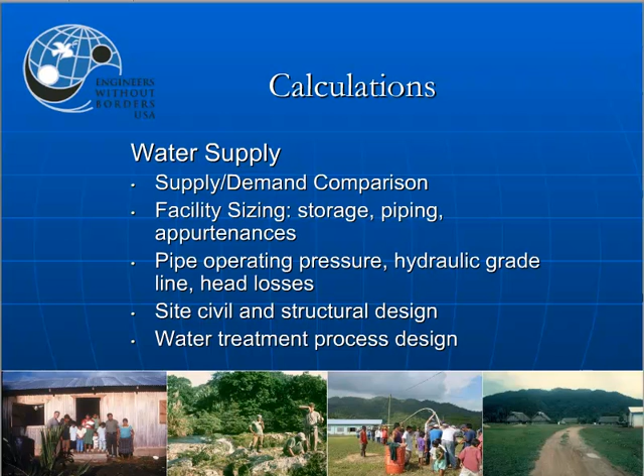You may have a specific problem in your design that you need something else that's not listed here. Well, you have to supply that. You can't just say, oh, well, you didn't have it listed in the calculations we had to show. This is really just a bare minimum. You may need, and you probably will need, additional ones. I just don't know what they are because I don't know what your exact project is.

And so now let's look for a little bit at what kind of structural calculations you'd need. Number one, the design loads. I can't stress this strongly enough. You have to say at the start of all the calculations, these are your loads. And you have to have that backed up with some kind of documentation that it's appropriate for this area. Secondly, the material strength. We need to know what you're assuming for the material properties for everything that you're using in your project.

For the soils, you have to let us know whatever's appropriate for the structure you're doing. It may be that the only thing that matters is the bearing capacity. Fine, tell us that. It may be that you need to know the passive and active earth pressures for a retaining wall. If that's the case, then tell us those too. But tell us up front, these are the soil characteristics.

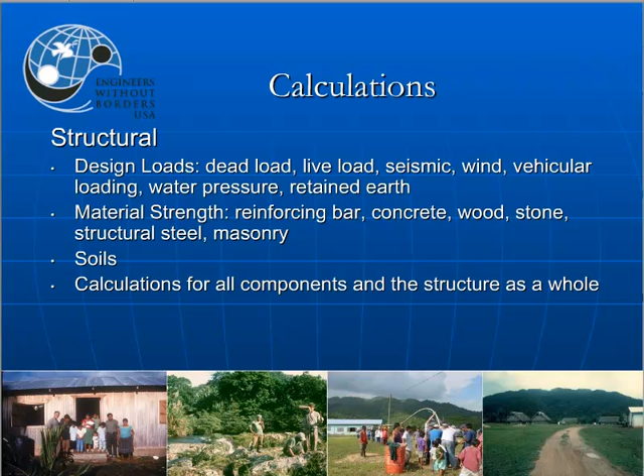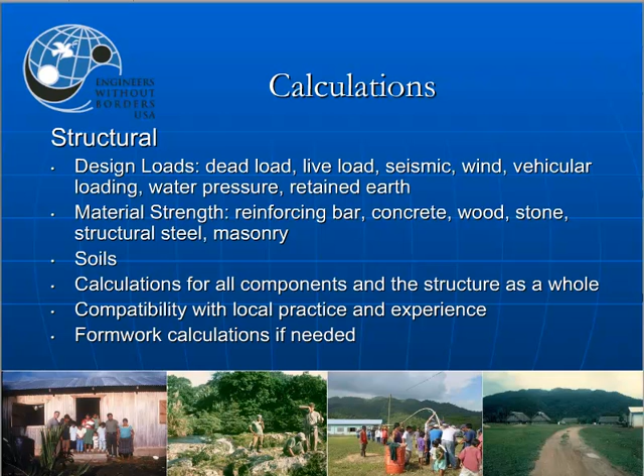Then we need calculations for every component of the structure and the structure as a whole. If there's any little bit of the structure that has not been designed and there's not a calculation for it, be prepared that it will be considered deficient because we were expecting a calculation for it. We'll expect that your design, your calculations are compatible with local construction practice and local experience. And then always remember to include formwork calculations for concrete work if it's appropriate.

So now let's go on to the drawings, and we'll start with general expectations. These should be a complete depiction of the facility. It's not some conceptual level sketch. And anything you intend to construct has to be described in a drawing. And the one thing I would say is, we have a lot of example drawings on the EWB-USA website. We have some ones that I would consider great drawings, including a bridge drawing on there. And then we have some that I would consider real good, including some water system drawings and a structure. And those, of course, are not appropriate for your specific project, but they let you know the level of effort that is kind of required in order to get approval from the Technical Advisory Committee.

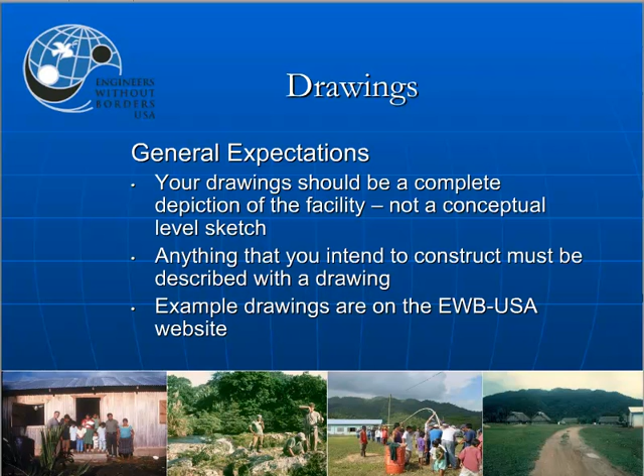So let's go on now to some specific instances of what would be required for drawings, and for structures, and let's start with buildings and tanks. Number one, cover sheet, including a location map and a site plan, foundation and floor plan, roof plan, building sections, building elevations, and wall sections. And if students that are looking at this webinar think, God, I have no idea what those are, we can only say, we understand that because when we were students, we had no idea what they were either. But your mentor does, or your mentor should, and they will lead you through the process of putting these drawings together. We don't expect you to know how to do this, but we do expect you to be able to do it with adequate guidance from your mentor.

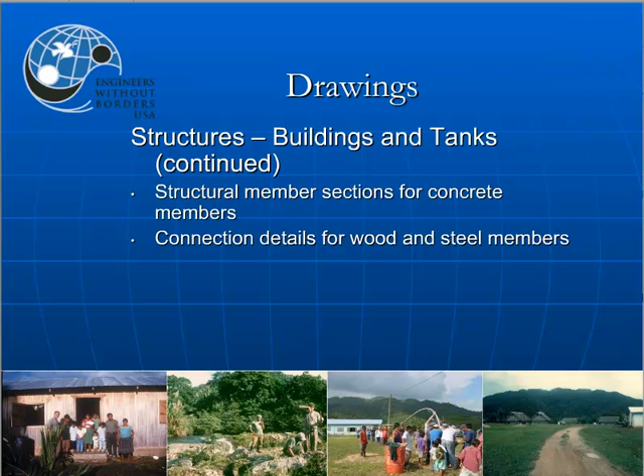An important thing to remember about drawings is that a lot of times your professor may not be the best person to tell you what goes in a drawing, because they're just not that experienced with it. And so you're better off with a practicing structural engineer when it comes to drawings. And so let's just continue with structural drawings, buildings and tanks. You'll want structural member sections for concrete members, connection details if there's any wood or steel, reinforcing bar bending diagrams, what we call here in the States shop drawings. If you have a building and it's gonna have electricity in it, we need to see the electrical wiring diagram. If it's going to be plumbed, we also need to see the plumbing diagram.

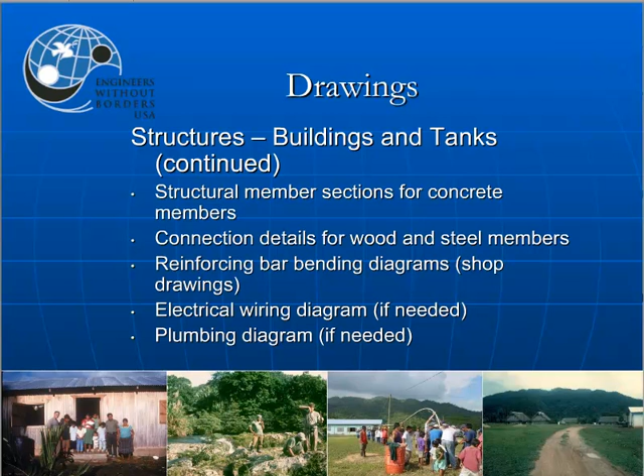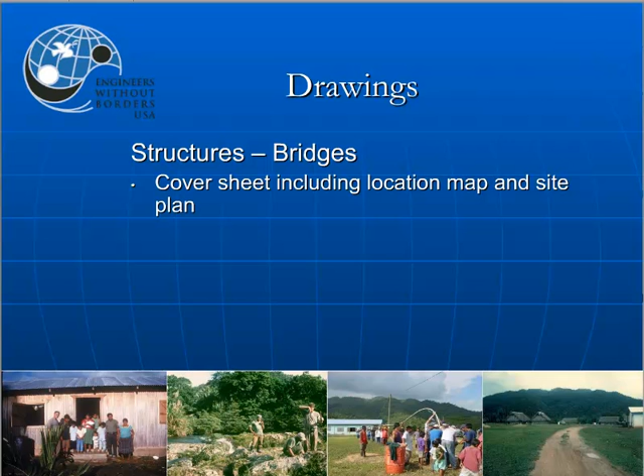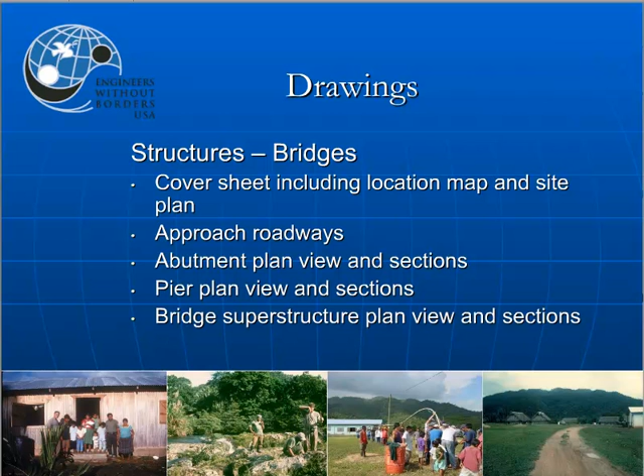And so again, that is just kind of the barest outline of what we would expect for drawings for buildings and tanks. So let's do structures now. Bridges, again, cover sheet, including a location map and site plan. We want to know how the approach roadways fit into the whole thing, how they connect to the bridge. We'd want to see abutment plan view and sections. If you have piers, the plan view and sections, and then the bridge superstructure, plan view and sections.

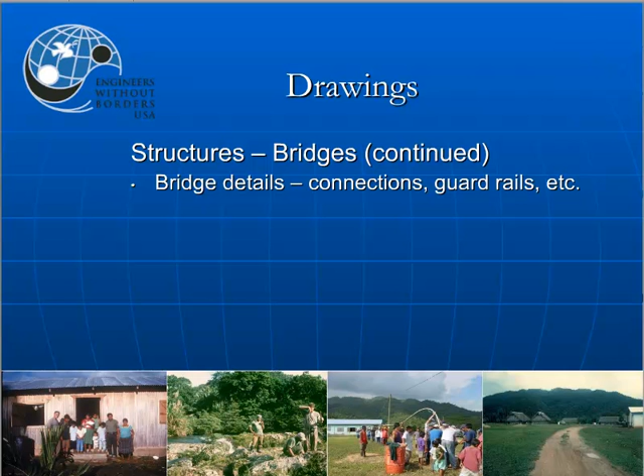And going on with the bridges, any small details like connections, guardrails, things like that, we'd want to see.

And this next one is quite important. A lot of times for bridges, the most difficult design work that you do is actually the falsework or the formwork for the construction phase. So you have to build wooden formwork in order to hold up the concrete while it's wet, before it cures and hardens and forms a structural section. So the construction phase may be the more difficult portion of the design that you do.

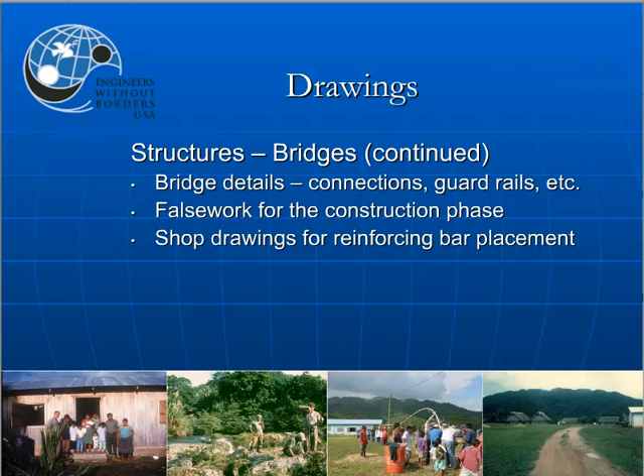And then lastly, drawings, shop drawings for reinforcing bar placement. This really is just to help you transition from the drawings of the bridge itself to building it. The shop drawings show you exactly how long each reinforcing bar is and where the bends are, and that will help you when you're at the site.

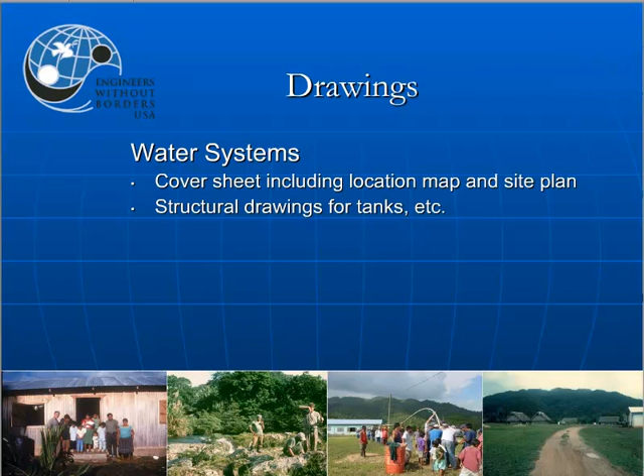And so now let's go on to water systems. We'd want to see again a cover sheet, any structural drawings for tanks, some kind of topographic map or sketch with the components of the system overlaid on it, and then any other items that are really important for your specific situation. It may be land ownership's real important. If that's the case, let us know.

It may be land use is different. If you're going through a busy town, it's real different than going through open country. If you're going through open country, you may not need to give us as much information about the land use. If you're going through town and there's other buried utilities, you're going to have to give us a lot of information on the drawings. You need to show the piping size, material, and then a trench section, and you need to show this in plan and profile.

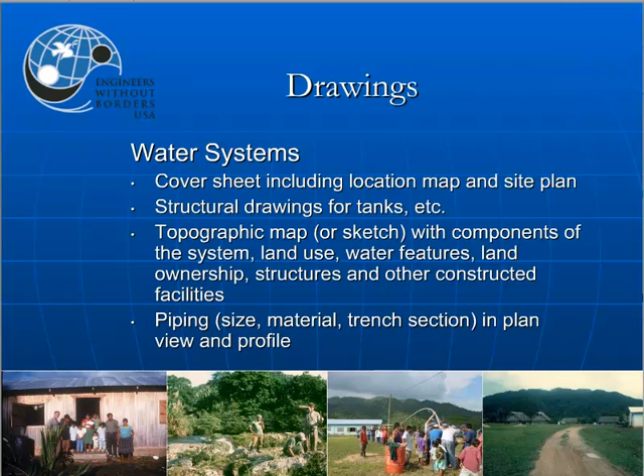And then any appurtenances that you need, and there's a lot of these, valves, thrust blocks, pressure relief valves, all this stuff, you've got to show in some detail, and you likely will get a lot of questions about this from the Technical Advisory Committee, because a lot of times one little thing, say you didn't put in one pressure relief valve, or you left out one clean-out valve, that's what can make the entire system inoperable. You have 3 kilometers of pipe that are great, but this one valve is ill-considered and has been placed improperly, and that's what makes the whole thing not work.

Pumps and pumping stations will need some information about that. And it's enough information for the Technical Advisory Committee to really make sure that the pump will work, it'll work on the long term, and it is operable and maintainable by the community. Any electrical wiring diagrams for the pump and pumping station.

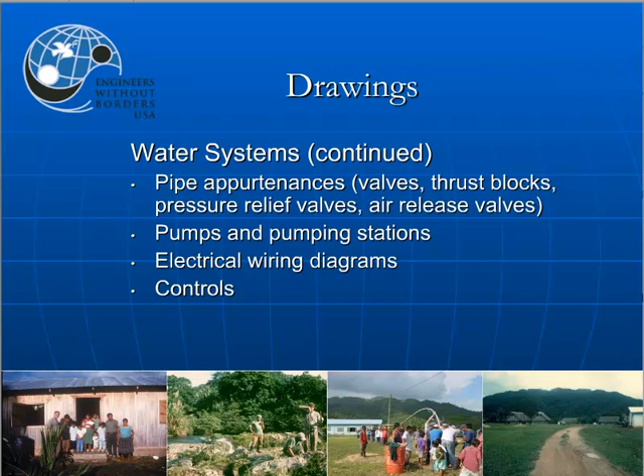Controls can be important if you have a pump and a tank that are remote from each other. Those can be real important. Sometimes there's no controls at all, in which case clearly you don't need anything there. If there's any water treatment, we need to know what that looks like. So that was, in general, what you need for drawings. And again, if you have any questions about that, we recommend that you go to your mentor, work closely with your mentor so they can assist you through the process.

So construction, this is the point in the 525 document where you show the Technical Advisory Committee. You've convinced them with the drawings and calculations that you know how this thing should be designed. Now you're in the construction part of the document. Now you have to convince them you know how to build it. And it could be that the chapter really isn't doing much at all in the way of building because you've hired a contractor or the community is doing the work. That's fine.

The first thing you want to show in your construction portion of the document is let us know what is the role of the chapter. Are you the construction manager? Are you construction oversight? Are you essentially the client's representative? Are you the labor? Are you building it? You have to let us know what role you have. And then who will do the actual construction.

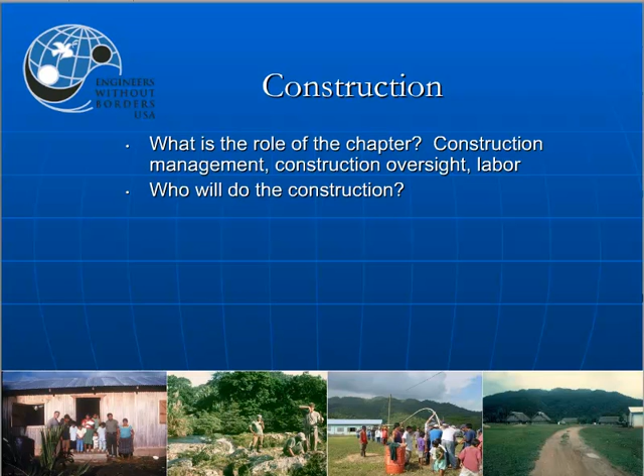And then there should be detailed planning for the construction process. And the planning should show us that you have a good knowledge of the tasks that need to be done, how long those tasks take, which tasks go before other ones, etc. There should be a list of materials, labor, equipment, etc.

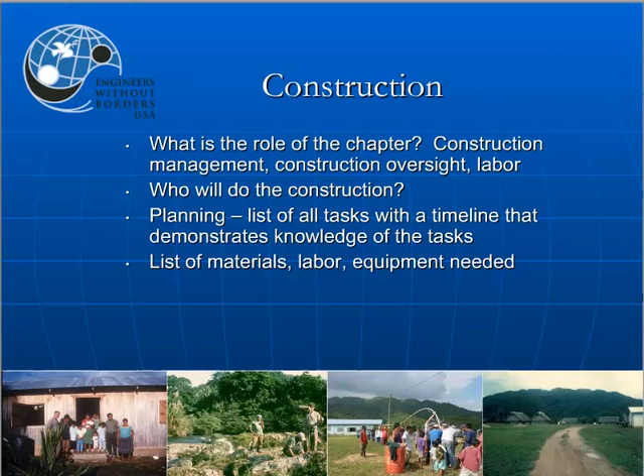And then this one is real important. Have you constructed a prototype? What the TAC is guarding against is the occasional chapter that wants to go to the site and, for example, show the community how to build a ferrocement tank, but they've never done it themselves. You are never going to get approval from the TAC to actually build something if you don't have experienced personnel on your team in doing that.

It could be that you're depending on construction expertise in country to do the work, and you have done a thorough job vetting a construction company that will do the work. If that's the case, that's fine. Then we don't need to know that you know how to do it. We just need to know that you've investigated this construction company that's in country and that they know how to do it. That's fine with us.

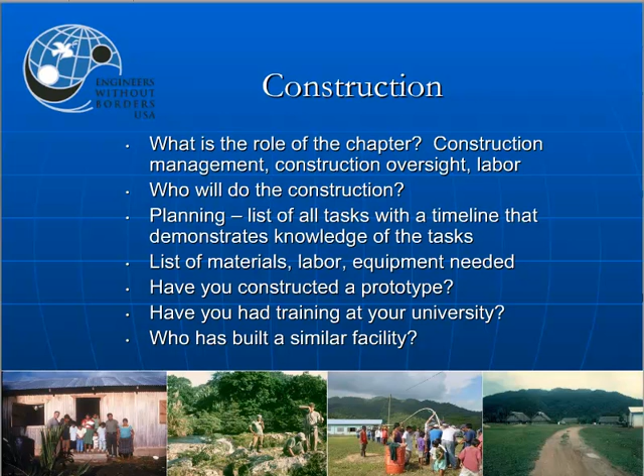And then, have you had any special training at your university? And then, who has built a similar facility? It can be as simple as you've learned at your university, you've practiced gluing pipes together. That's fine. Or it may be, gosh, our mentor does this for a living. He's a construction engineer, knows exactly how to do this. That's great. Then he or she can take the lead role in that and train the rest of you. You just have to let us know who knows how to do all this stuff.

Operation and maintenance. So you've convinced the TAC that the design is good. You've also convinced them that you know how to construct it. Now you have to convince the TAC that this project is going to be operated and maintained in the long term by the community, and that the community has all the resources it needs in order to do this operation and maintenance. So the first thing you're going to have to do is describe what the operation and maintenance activities will be.

For something like a bridge, they may be fairly negligible because once you have built it, hopefully, knock on wood, nothing much goes wrong with it, and it's good for 20 to 30 years. On the other hand, if you have something like individual home slow sand filters, there's going to be a lot of operation and maintenance that each home member is going to have to know how to do, and so you're going to have to describe those activities to the TAC in detail.